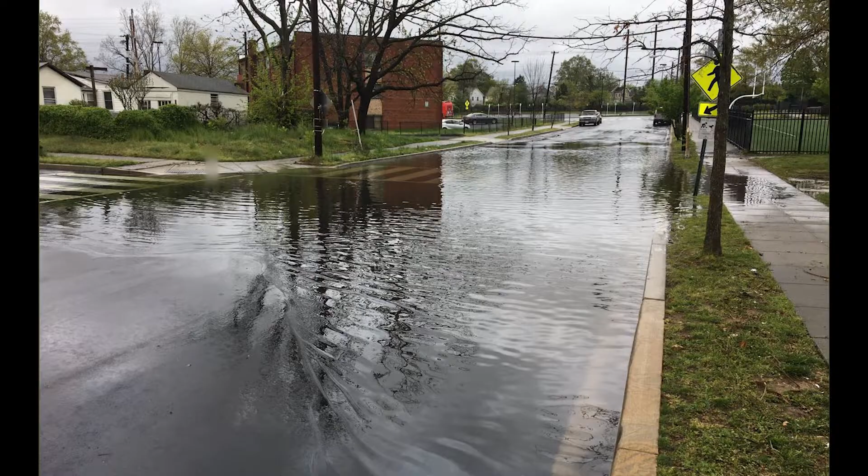Join us as we explore outcomes and options from the Silver Jackets' new Watts Branch Flood Risk Management Study, which was discussed in Part 1 of Module 4.

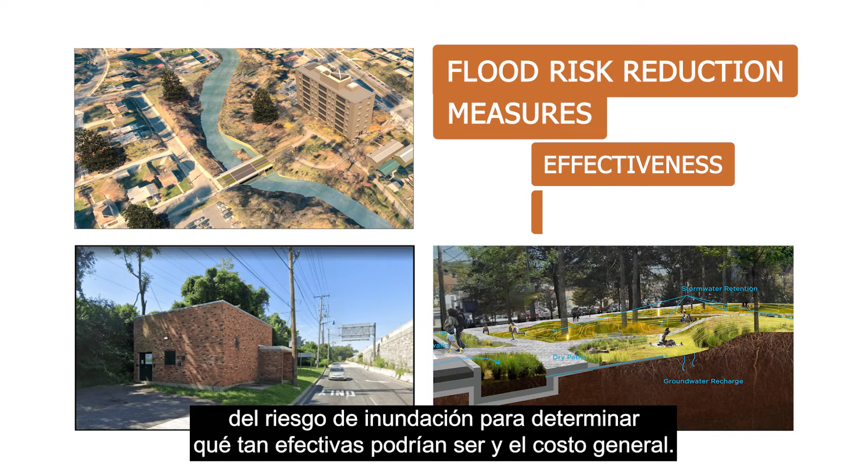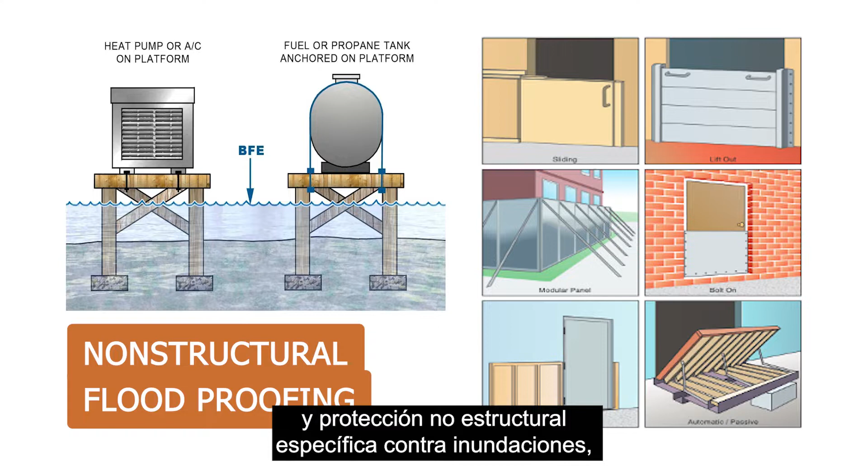In addition to revising area flood maps, the study evaluated several flood risk reduction measures to determine how effective they might be and the general cost. These strategies included large-scale public works projects, blue-green infrastructure networks, and targeted non-structural flood-proofing, which will be described in this module. Each of these strategies has inherent challenges. Any that move forward will require a different level of planning and investment.

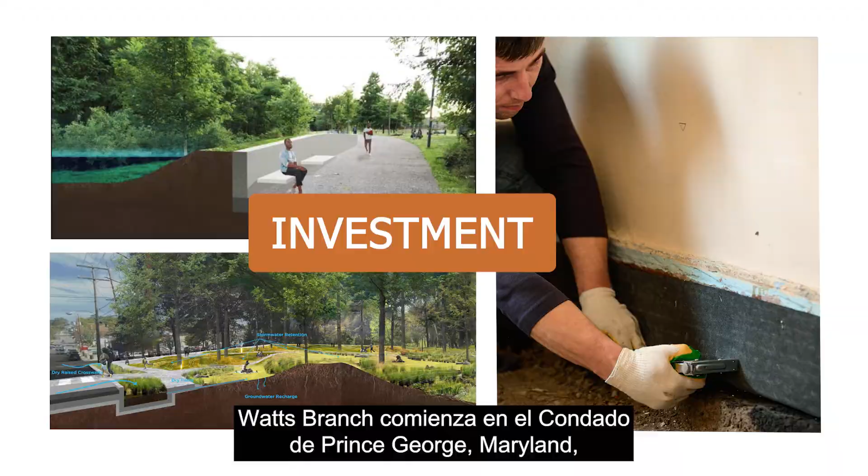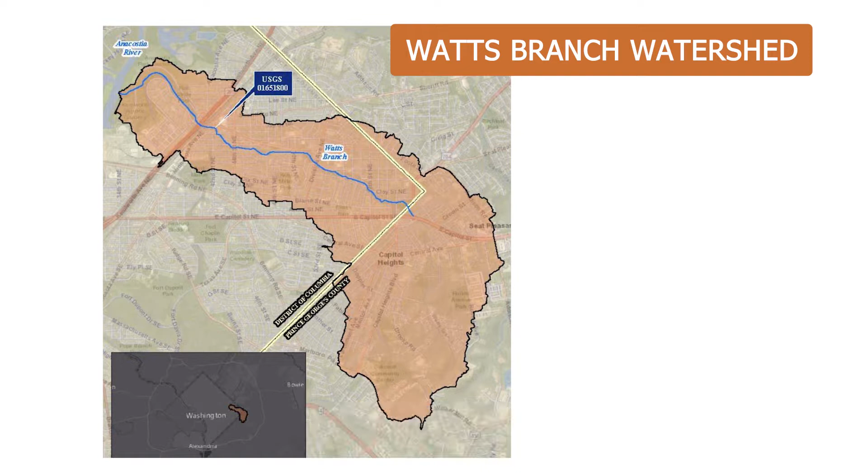Watts Branch starts in Prince George's County, Maryland, and winds its way through the Northeast District neighborhoods of Lincoln Heights, Holbrook, Deanwood, Central Northeast, Eastland Gardens, and Mayfair on its way to joining the Anacostia River. The Watts Branch watershed, or the area of land where water drains into Watts Branch, covers about 4 square miles.

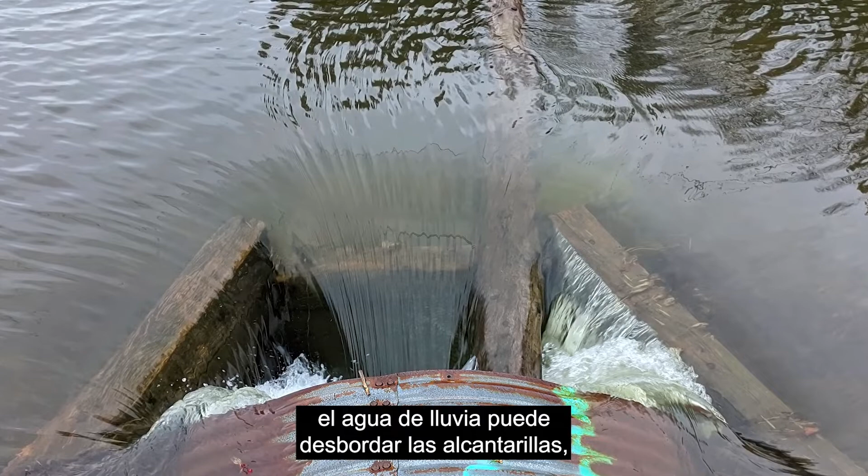Increased development of the Watts Branch watershed has made it more vulnerable to flooding. Where Watts Branch crosses roadways, water flowing through the stream must pass through underground pipes, also known as culverts. Many of these culverts were designed to carry stormwater flows from moderate rainfall and not from larger events like the 100-year storm. When there's a large storm, the rainwater can overwhelm the culverts, causing water to back up and flood areas upstream.

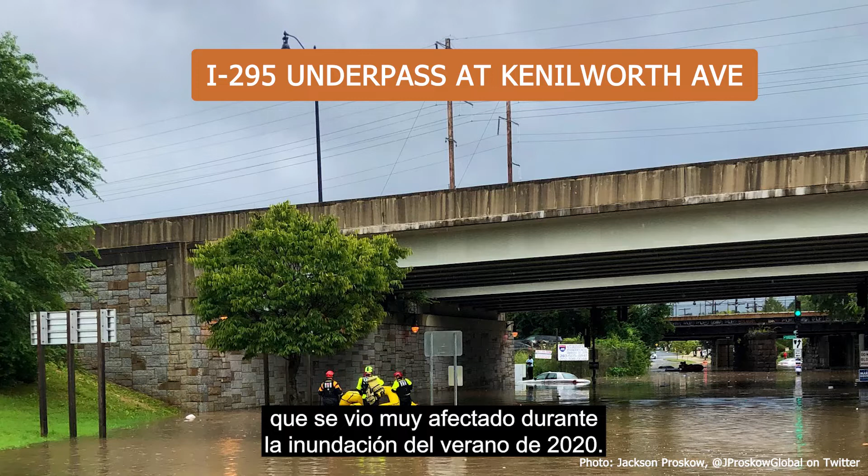One of the areas with highest flood risk is the I-295 underpass at Kenilworth Avenue, which was greatly impacted during the 2020 summer flood. Currently, the Dean Avenue pump station helps remove floodwater from this area.

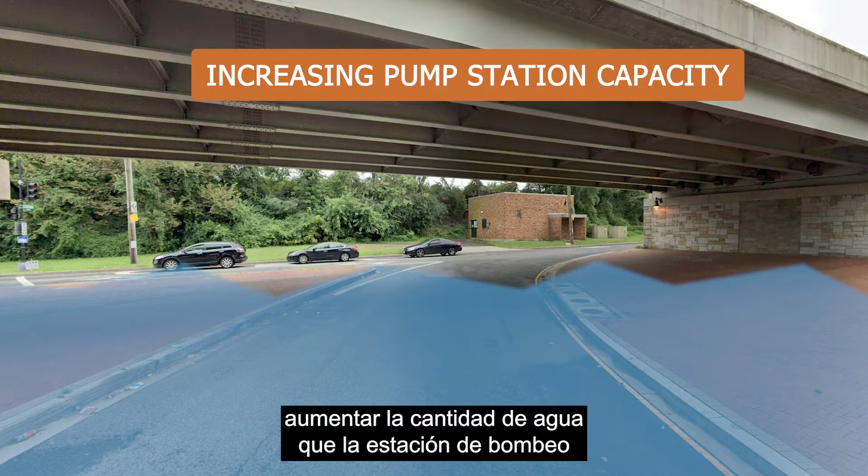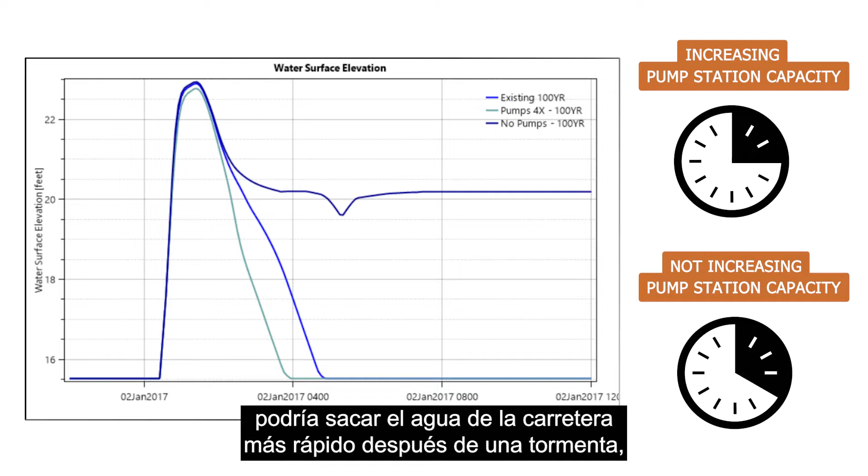The team looked at the potential for increasing the amount of water the pump station could remove from the street, known as the capacity. Preliminary analysis showed that increasing pump station capacity could move water off the road faster after a storm, but would not eliminate flooding in the area.

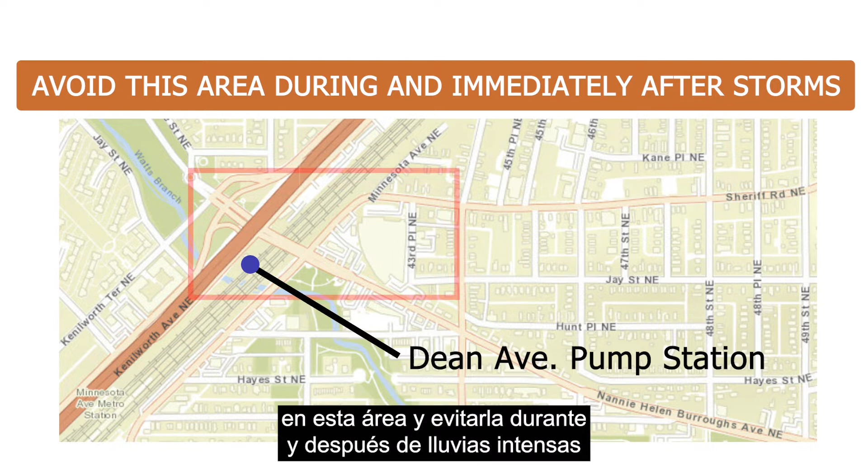This type of project would also require extensive upgrades to the overall stormwater pipe network, which would be costly and take many years to implement. The community should be aware of flood risk in this area and avoid it during and after intense rain events, until the current pump station has cleared the water from the roadway.

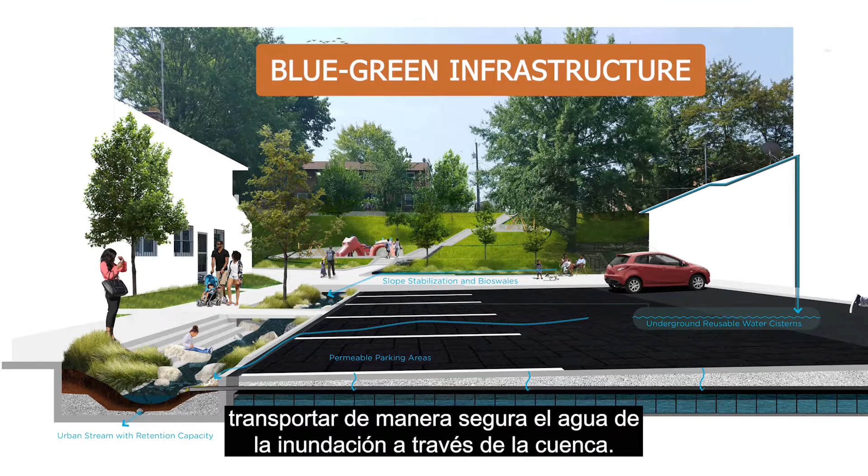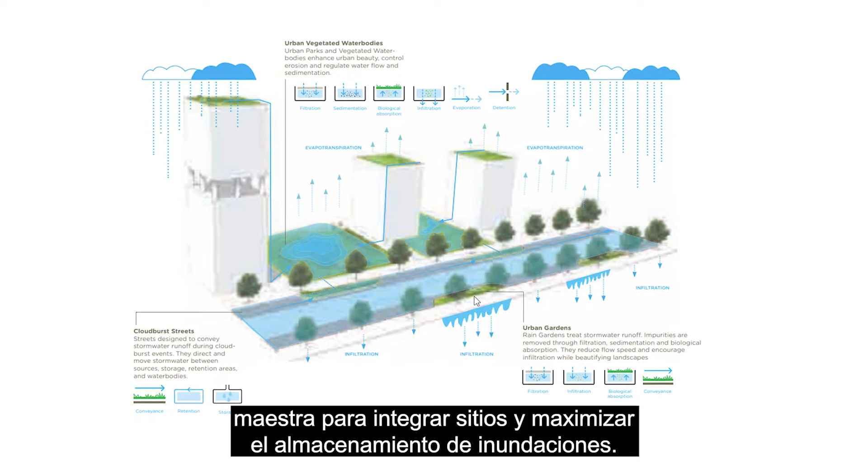The largest scale and most effective alternative that was considered is a network of blue-green infrastructure to safely store and convey floodwater through the watershed. This approach combines ecosystem-based technologies that reduce and clean polluted water with a master planning strategy to integrate sites and maximize flood storage. This alternative, known as the Cloudburst Concept Plan, or CCP, would focus on controlling how water flows

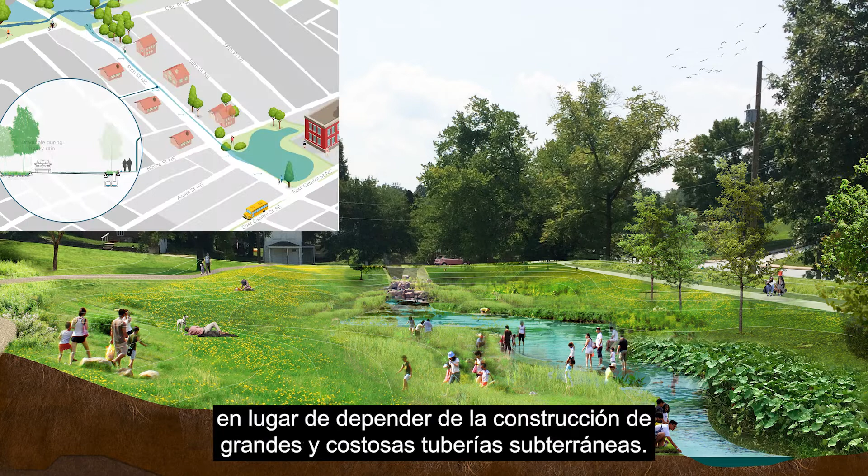over land, rather than relying on construction of large, expensive pipes underground. To develop the preliminary CCP plan, the Silver Jackets team worked closely with Ramboll, a global engineering and design company.

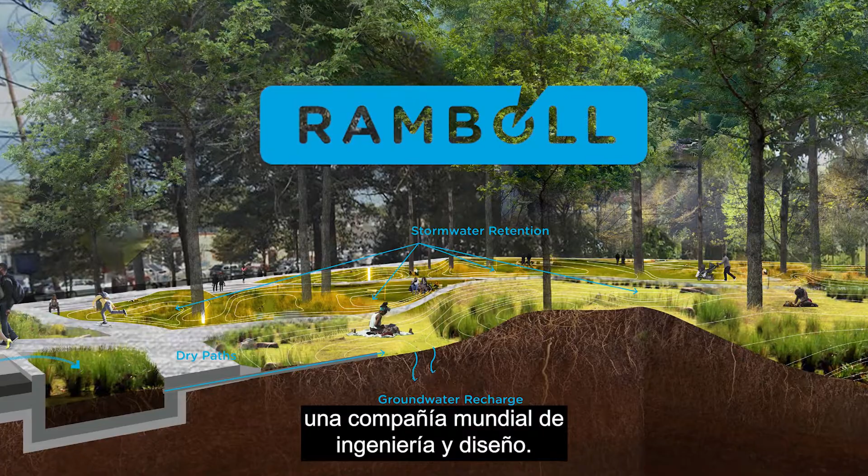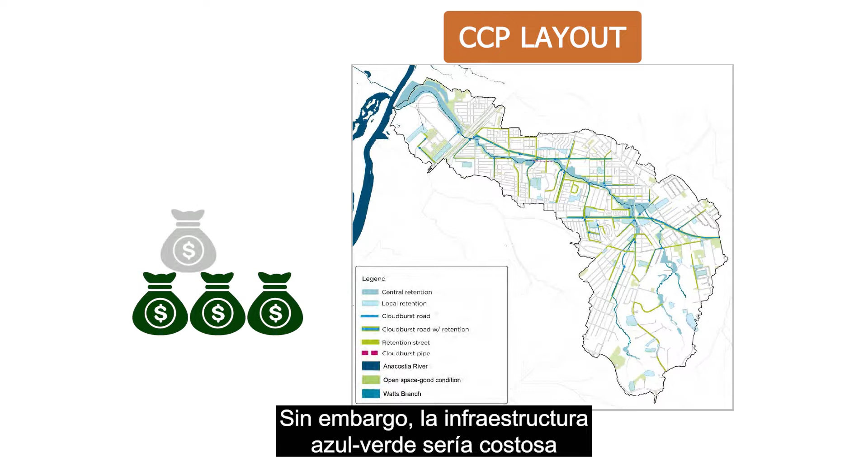Constructing a comprehensive blue-green infrastructure network would modify the floodplain, and 159 buildings, or 40% of the buildings, would no longer be impacted by a 100-year flood. However, the blue-green infrastructure would be expensive, and it would take many years to implement all the projects included in the CCP.

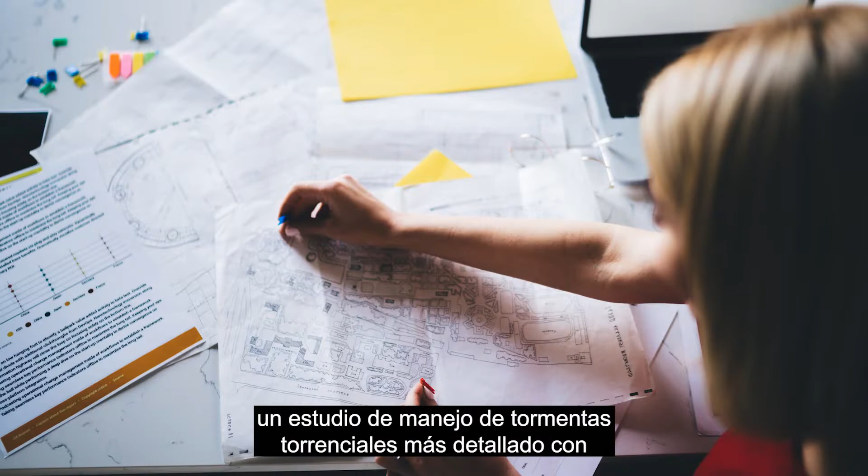This alternative, however, provides several other benefits, such as road improvements and the creation of public green spaces that improve quality of life. The CCP could also be implemented in phases. Therefore, the team recommends the district consider a more detailed cloudburst management study, with substantial input from local partners and stakeholders, to identify the highest risk areas for priority implementation.

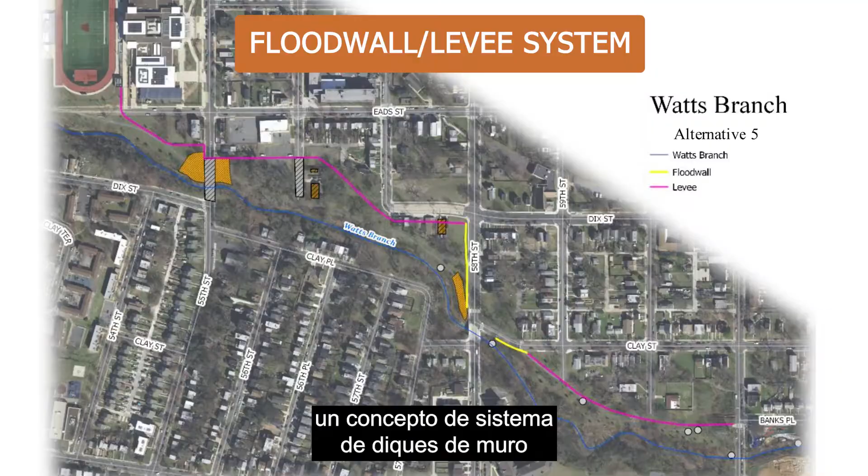A floodwall levee system is another alternative under consideration to keep the Watts Branch from overflowing. Based on physical constraints of the terrain and issues with flashy flooding, the team developed a floodwall levee system concept along the existing Marvin Gaye Trail between H.D.

Woodson High School and 61st Street Northeast.

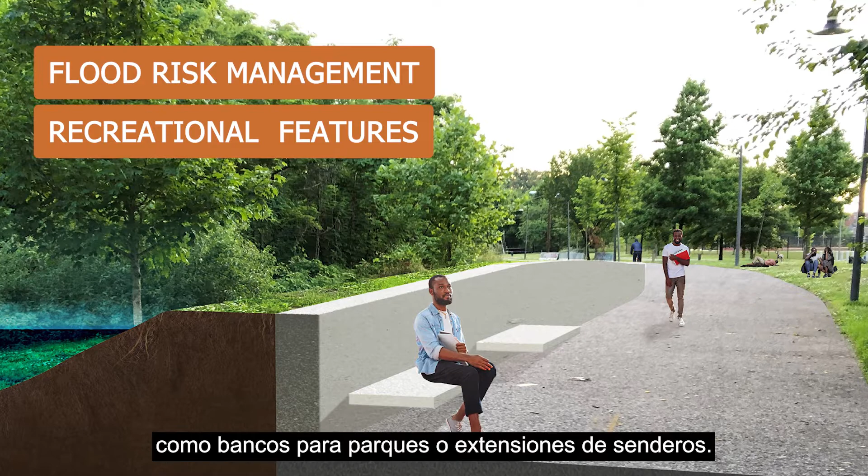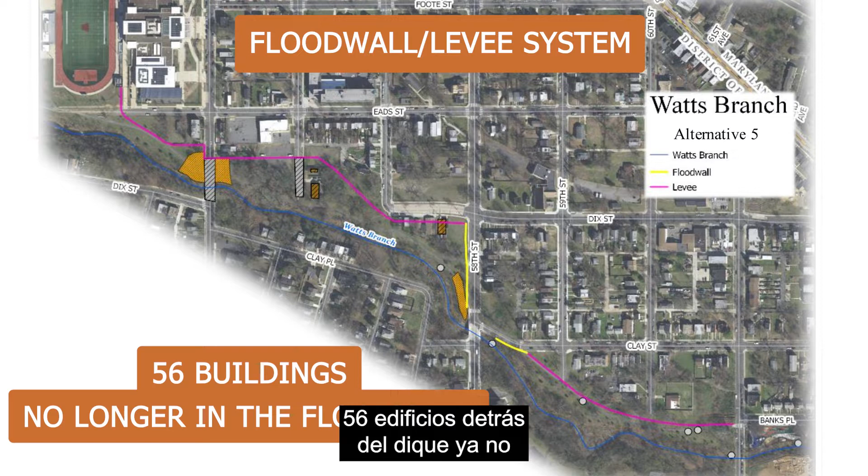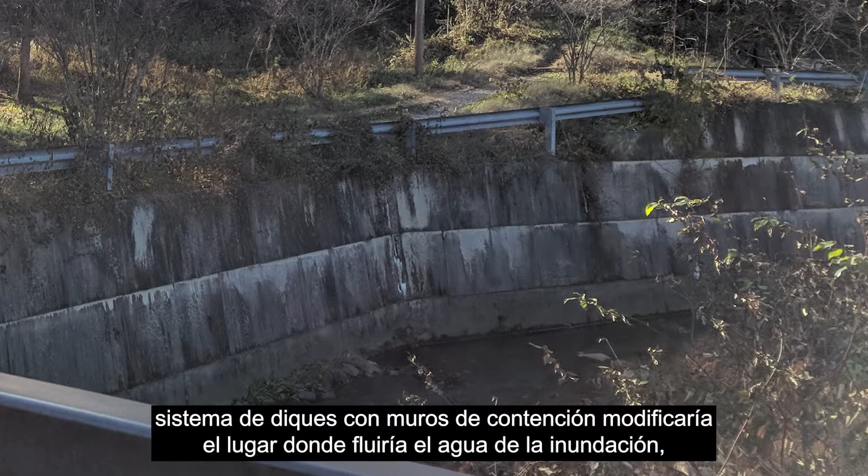With innovative design, the floodwall levee system could provide both flood risk management and recreational features such as park benches or trail extensions. Cost estimates for the preliminary design concept are mid-range compared to other alternatives. This plan would adjust the floodplain so that 56 buildings behind the levee would no longer be impacted by the 100-year flood. However, modeling also showed that the floodwall levee system would modify where floodwater would flow, increasing flood levels up to a half a foot downstream. Therefore, this alternative requires further engineering analysis and potential combination with other flood reduction measures.

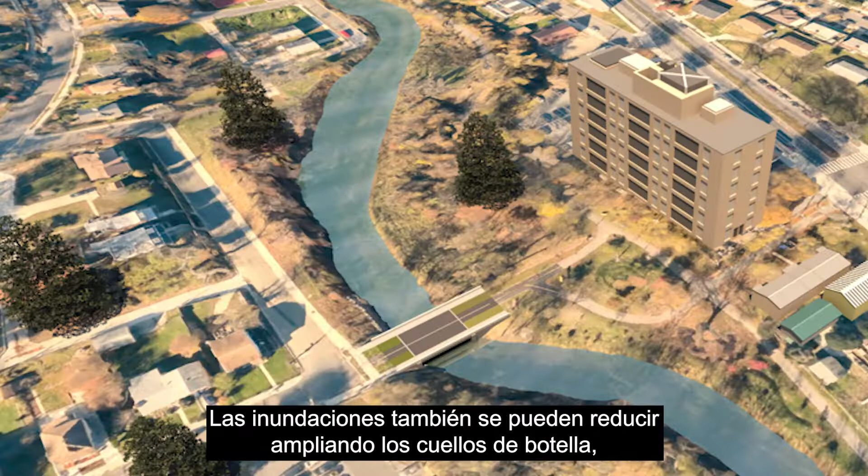The flood wall could also negatively impact views of Watts Branch and recreational access, and may require the removal of several roadways and buildings. Flooding can also be reduced by widening choke points, or portions of the Watts Branch that have been narrowed by development.

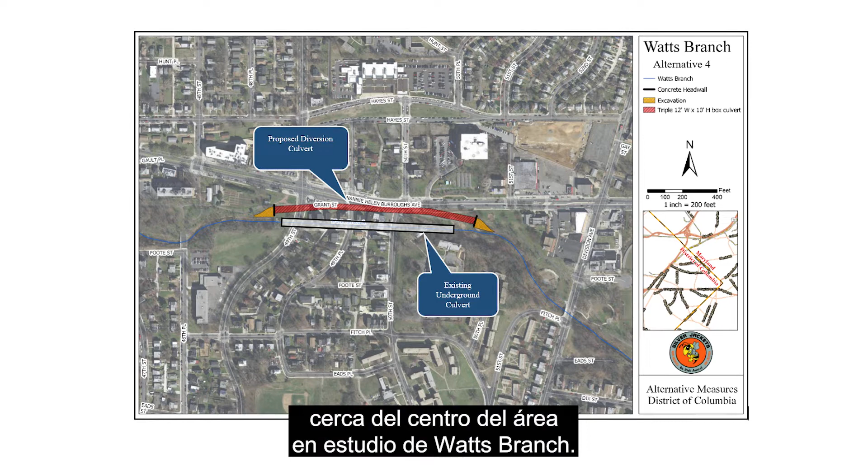One such choke point occurs in Nanny Helen Burroughs Avenue, near the middle of the Watts Branch study area. The existing culvert, running parallel to Nanny Helen Burroughs Avenue between 49th Street Northeast and 51st Street Northeast, was not designed to convey storm flows for large storms like the 100-year. Therefore, during significant rainfall, water can back up and cause flooding on the roadway.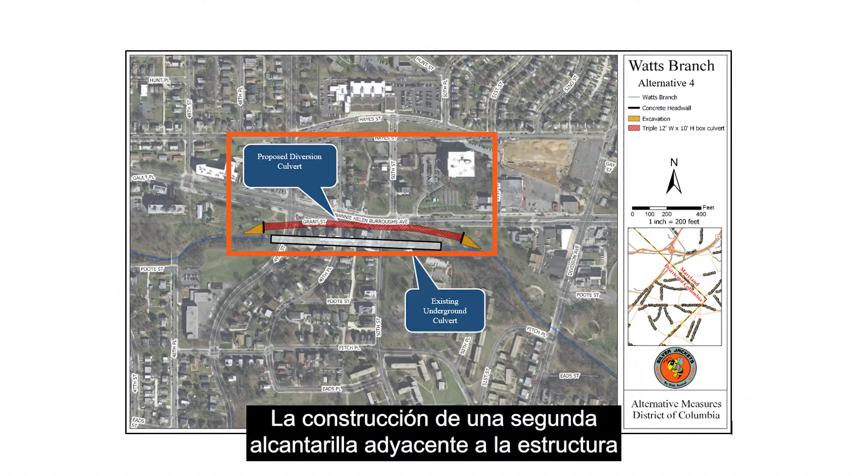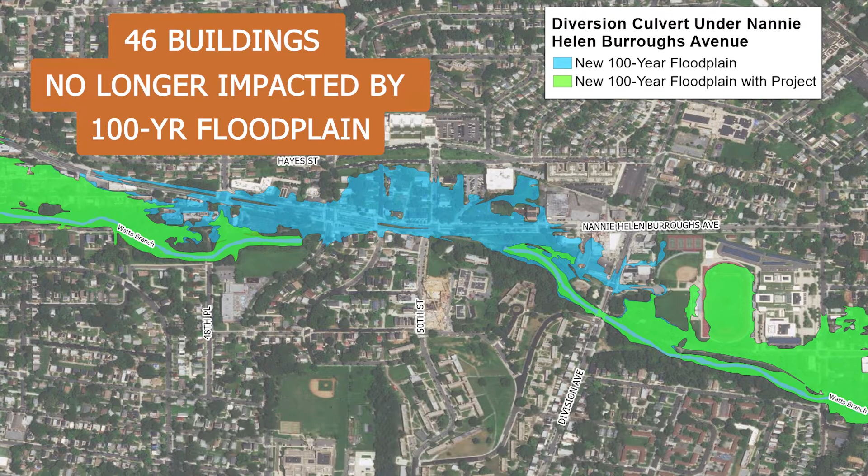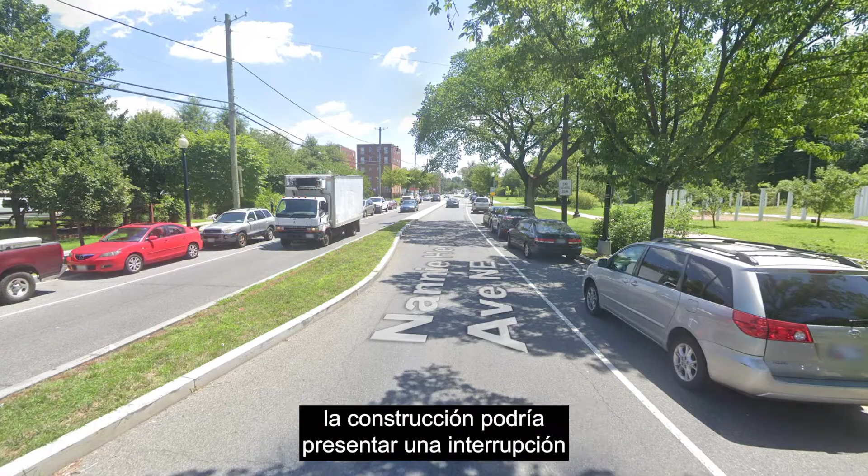Building a second culvert adjacent to the existing structure could expand the capacity and convey more water through this area, reshaping the 100-year flood zone so that 46 buildings would no longer be impacted. The preliminary concept layout of the secondary culvert was estimated to have a higher price tag than the flood wall levee system. While the culvert could be located entirely underground, construction could present a major disruption to a main thoroughfare and its surrounding neighborhood.

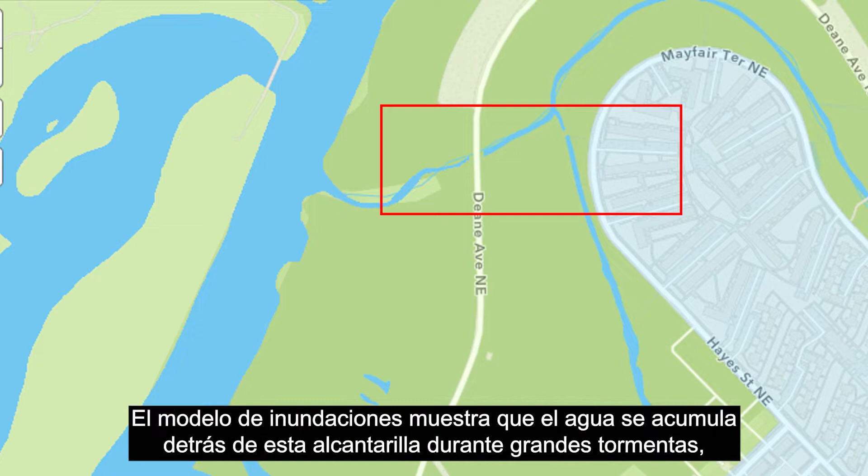Another choke point is located under Deane Avenue, just before Watts Branch discharges into the Anacostia River. This area is National Park Service property. Flood modeling shows that water backs up behind this culvert during large storm events, impacting the Parkside Mayfair neighborhoods.

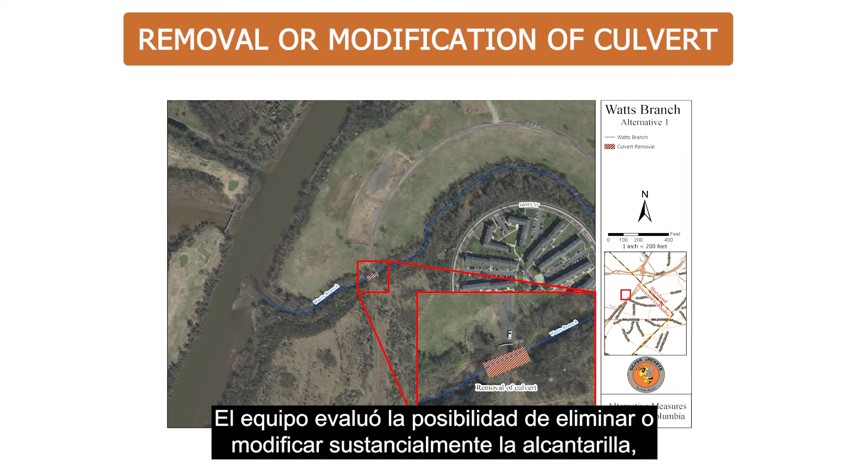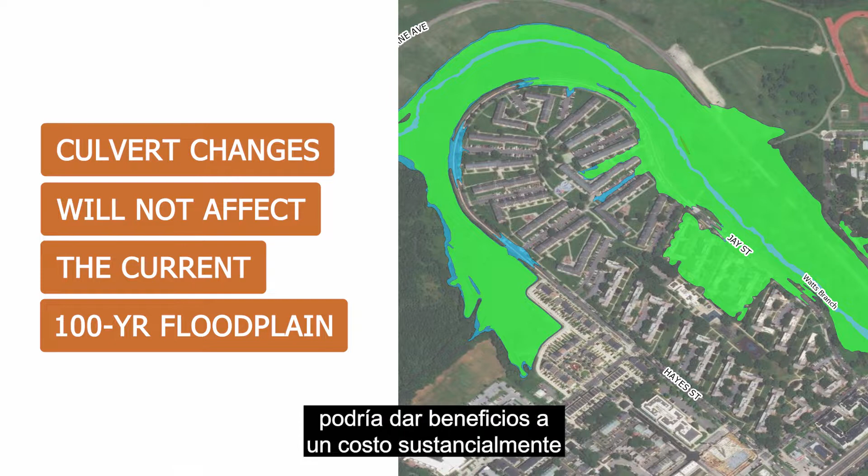The team assessed the potential for removing or substantially modifying the culvert, which would cost much less than the alternatives previously mentioned. Preliminary modeling showed that culvert changes would not significantly change the current 100-year floodplain. However, when considering longer-term flood risk related to climate change, it could provide benefits at a substantially lower cost than other alternatives, and could modify the future 2080 100-year floodplain and reduce the risk to 36 buildings.

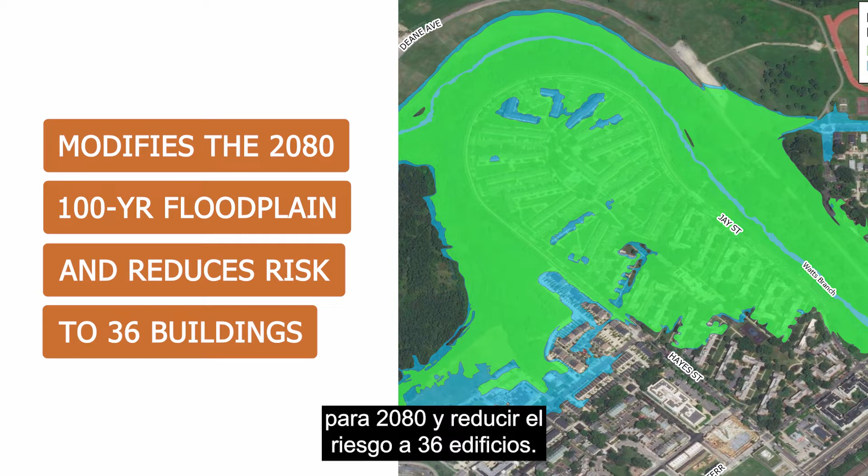A challenge to consider for this alternative is that the location of this culvert on land owned by the National Park Service may complicate project permitting. Therefore, future designs would have to align with the Park Service's natural and cultural resource management requirements.

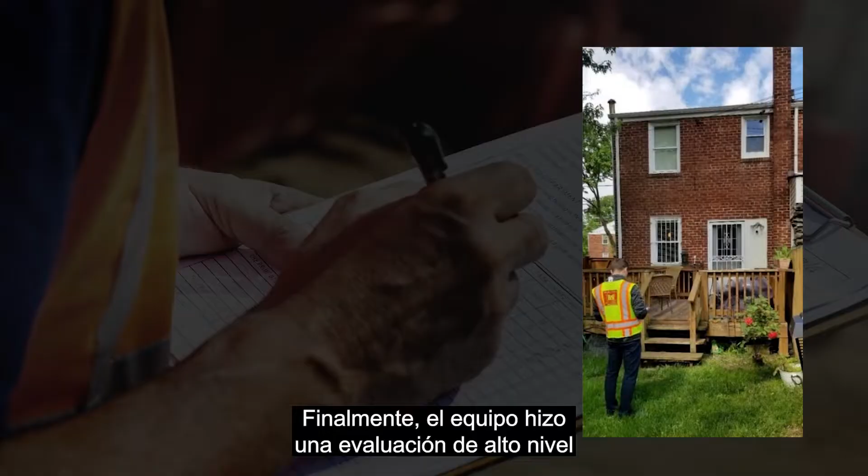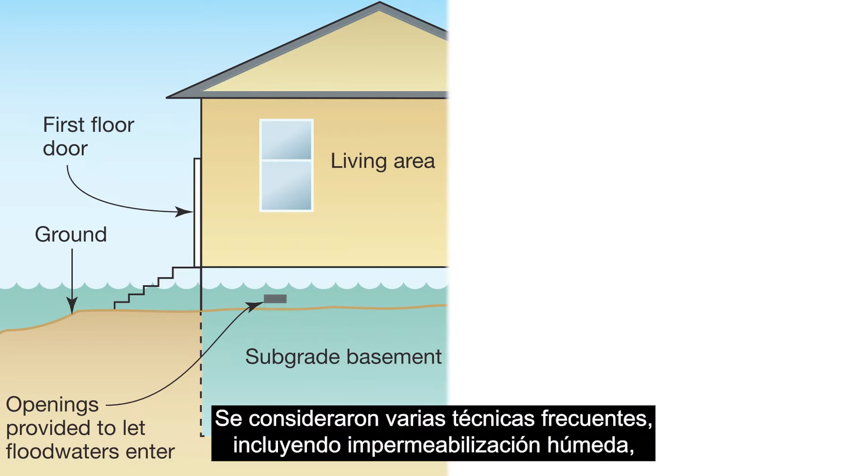Finally, the team conducted a high-level assessment of the potential impact of non-structural floodproofing. Non-structural floodproofing can reduce flood risk to individual and multi-unit buildings. Several common techniques, including wet floodproofing, dry floodproofing, elevation, filling basements, and property buyouts were considered. These techniques were discussed further in Module 2.

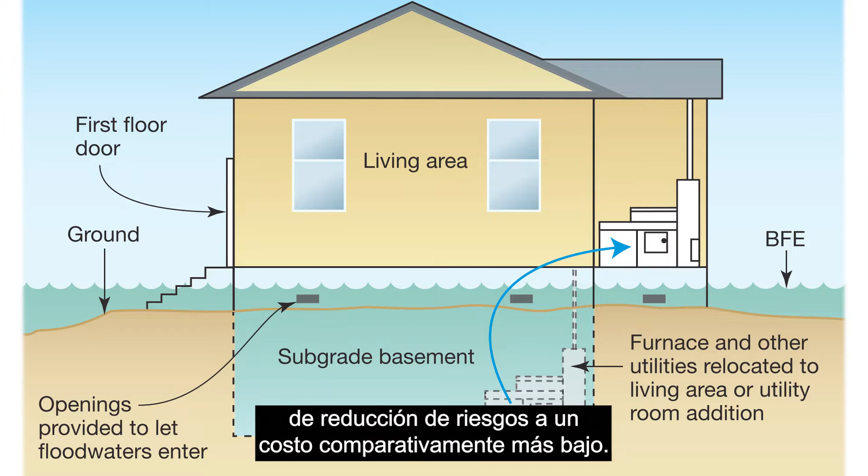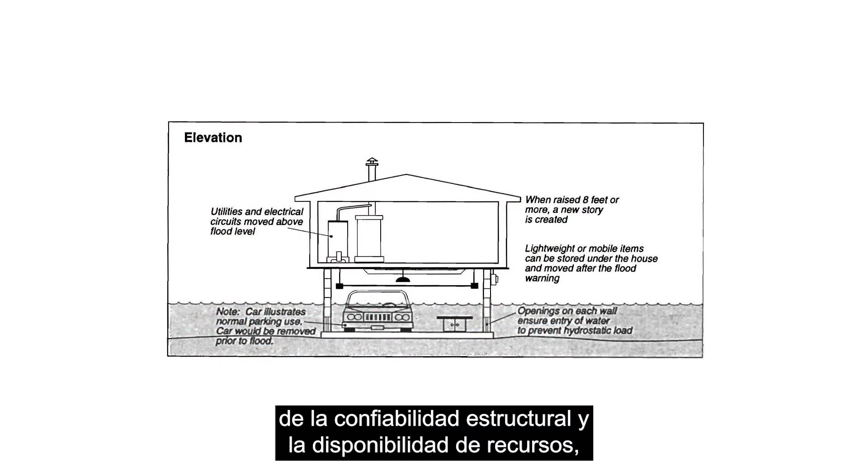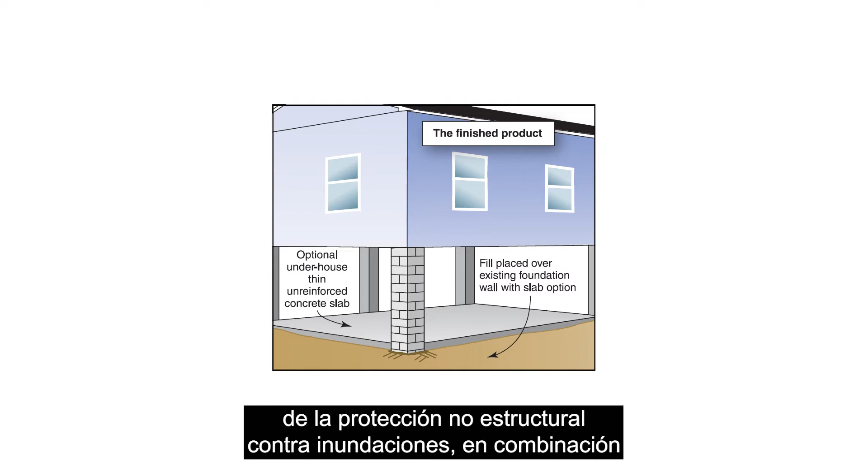Floodproofing can be an effective risk reduction strategy at a comparatively lower cost. It can also be implemented more quickly than large infrastructure projects. However, the feasibility of non-structural floodproofing is based on a case-by-case analysis of structural reliability and resource availability for both the property owner and local government. The study recommends conducting a more detailed analysis to learn how implementing non-structural floodproofing in combination with larger measures can provide additional benefits to the study area.